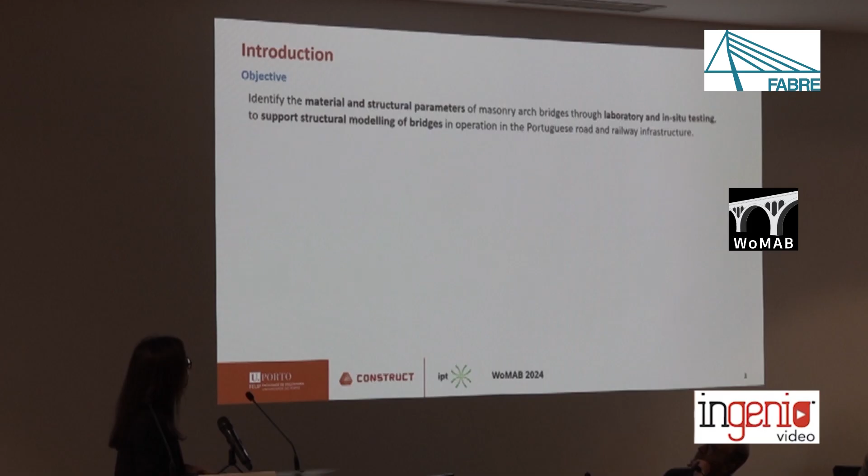I will talk about the experimental characterization of the structural behavior of masonry arch bridges, focusing mainly on experimental activities we conduct in our research group. The objective is to identify material and structural parameters of masonry arch bridges through laboratory and in situ testing, to support structural modeling of bridges in operation in the Portuguese road and railway infrastructure.

The methodology is very similar to the previous presentations, particularly from Professor Carmelo, and includes two components: experimental characterization and numerical modeling. For the experimental characterization, it includes general characterization of the bridges, geometric survey, visual inspections, and preliminary tasks. For the experimental activities, material and structural characterization, including lab and in situ testing. With all this information, we support updating and validation of the numerical models, and then perform structural analysis and structural assessment.

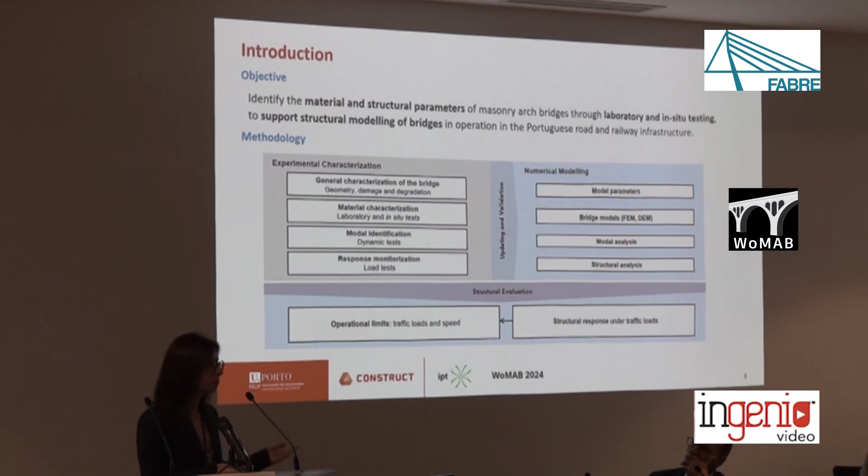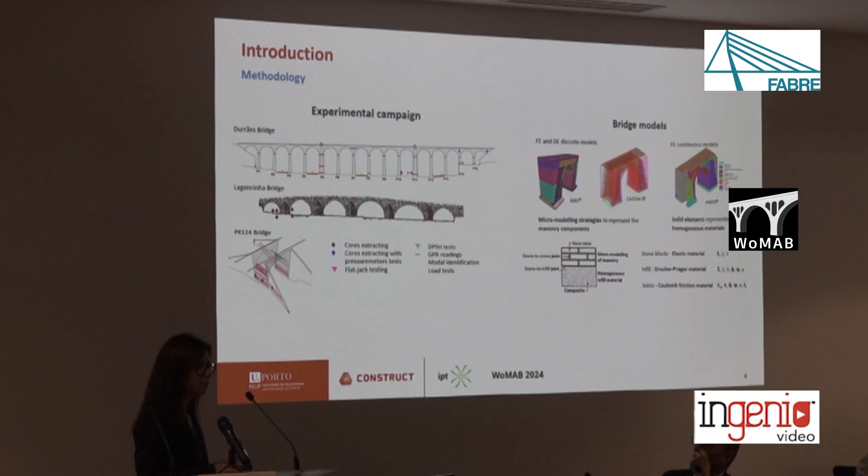Some words related to the bridge models on the right-hand side: we consider both FEM and DEM discrete models as well as continuous models. We can see three cases for the same bridge. In all cases, we consider a very detailed discretization of all the bridge components and materials, so a lot of parameters need to be defined. Hence the importance of defining model parameters based on experimental data and correlation between experimental and numerical results.

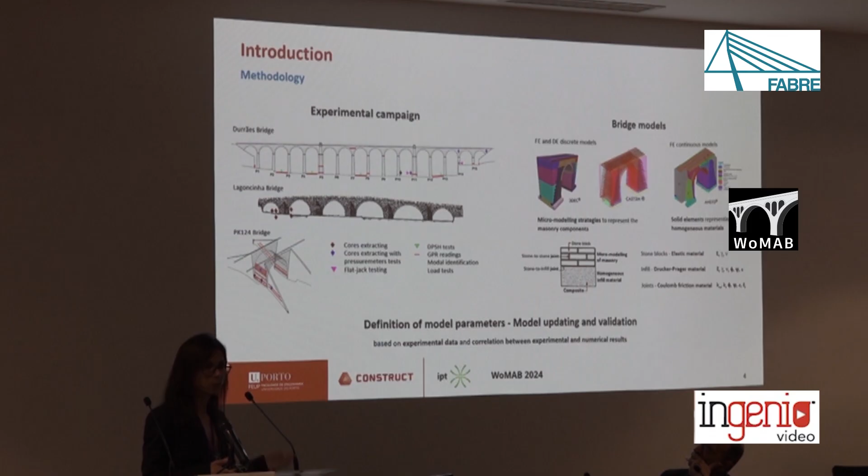First, some words about the case studies, bridges from the Portuguese infrastructure. They are all in granite stone. Here are two cases of railway bridges on the same line in northern Portugal, of about the same age. The first one, Durrães, with 16 arches. The second one with just one arch, a very common typology in our railway infrastructure.

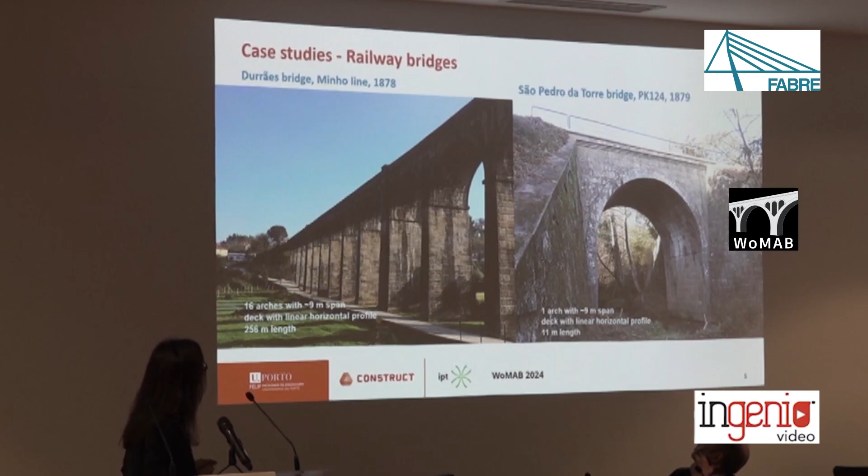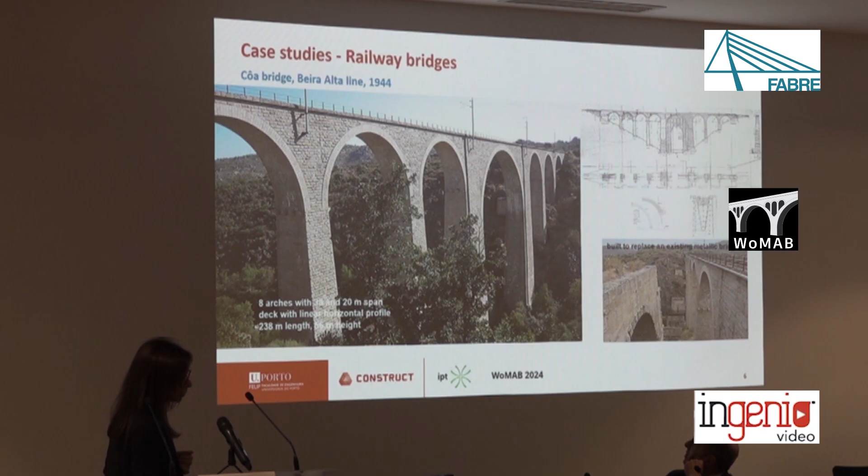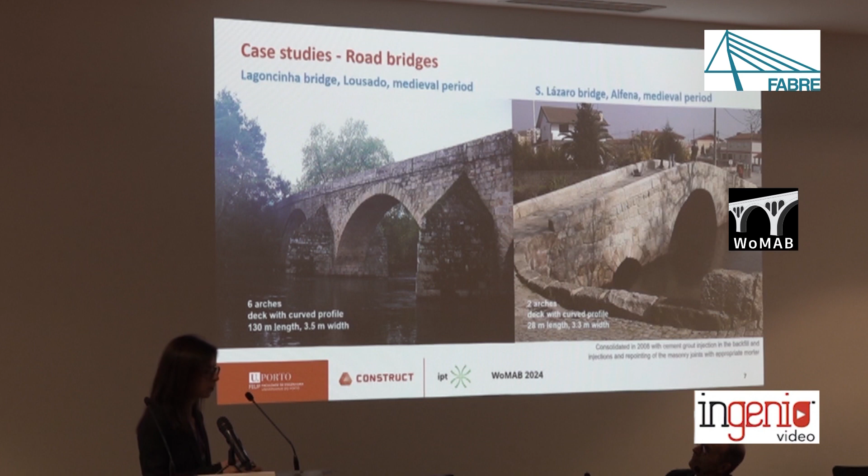We also developed some studies on road bridges. Here are some cases: Lagoncinha and São Lázaro, both from the medieval period. The first with 6 arches and the second, smaller, with 2 arches. Finally, Vila Fria Bridge was constructed in 2007 using traditional techniques. We were involved doing research on this project, which concerns this type of construction.

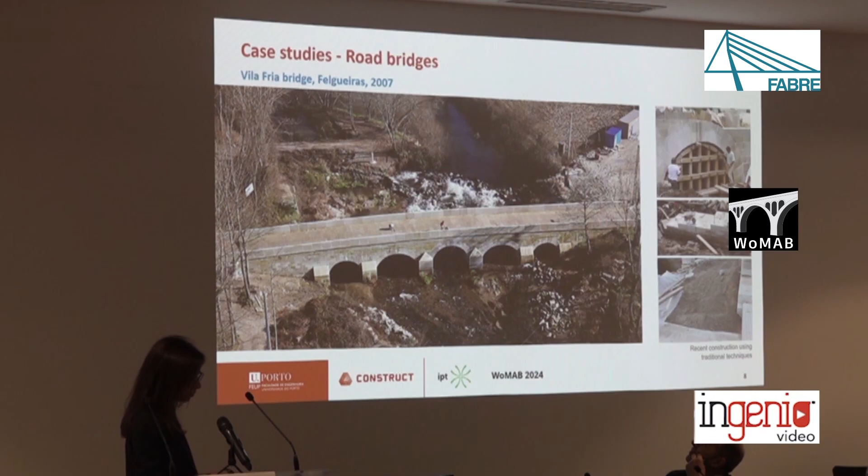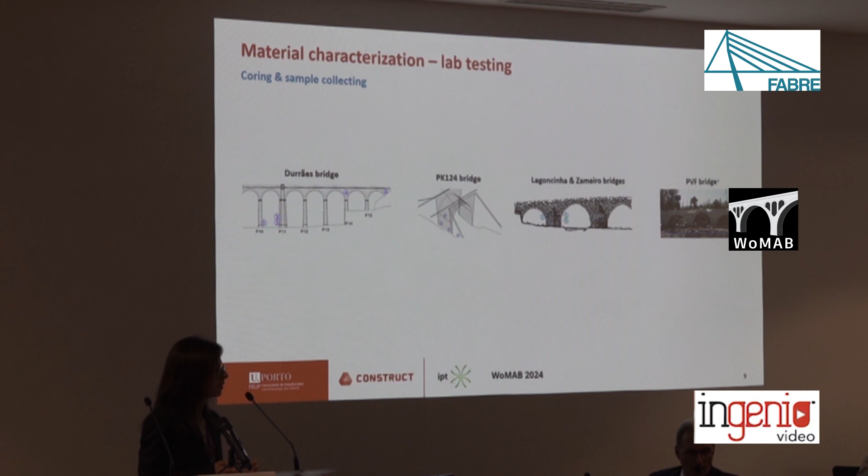We have some studies. Now going to the experimental campaign, starting with material characterization. The activities involve coring and sample collection. Here are some locations on some bridge cases, and all the samples collected relate to stones, joints, and infill in these old bridges, as well as samples from the material used in the construction of the new bridge.

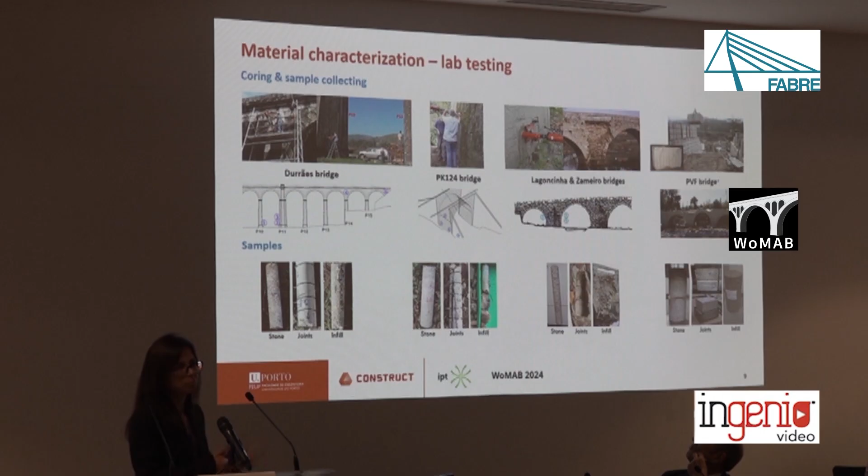We should note that for the stone, similar materials are used, granite stone. Also for the old bridges, the joints are quite similar, mortared. But regarding the infill, we have quite a difference between the railway structures and the road structures, with a cohesive material in the railway bridges and granular material for the road bridges.

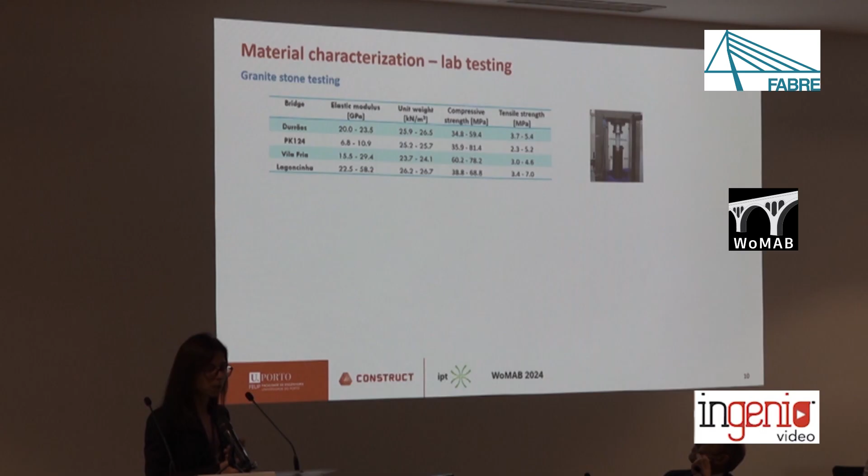Going to the lab testing, we performed the usual tests for this type of material on samples of granite stone, allowing us to obtain the elastic modulus, unit weight, and compressive and tensile strength for all the samples collected. We can see here the range of values we used for performing our structural assessment.

This allows us to evaluate the elastic modulus, but also parameters such as the friction angle and the cohesion.

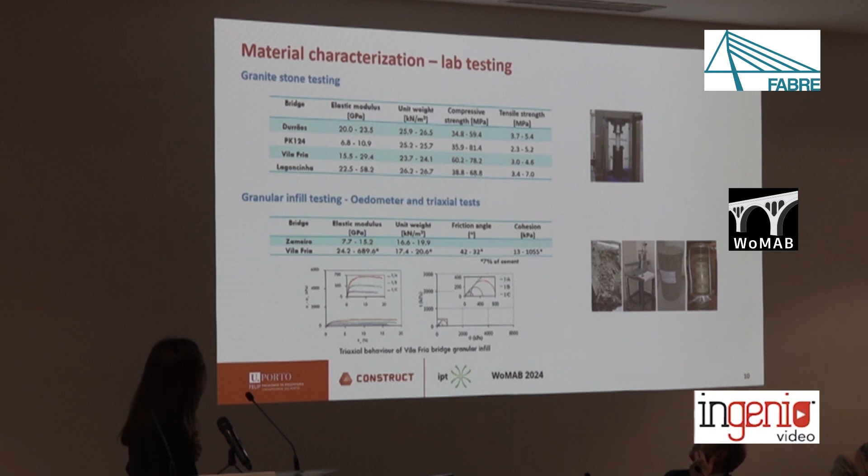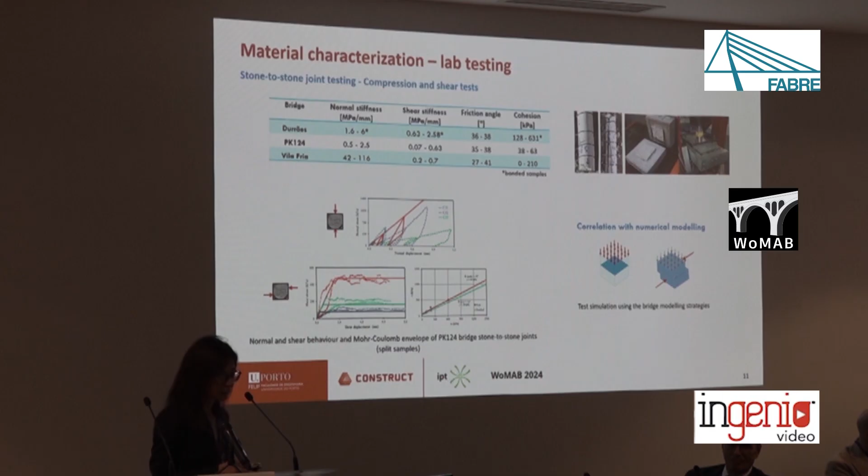At that level, we perform also correlation with numerical modeling using the same strategies we use for simulation of the whole bridge model, allowing to somehow validate at a material level the parameters we are going to use. We can see here the comparison between the experimental and numerical results with good correlation.

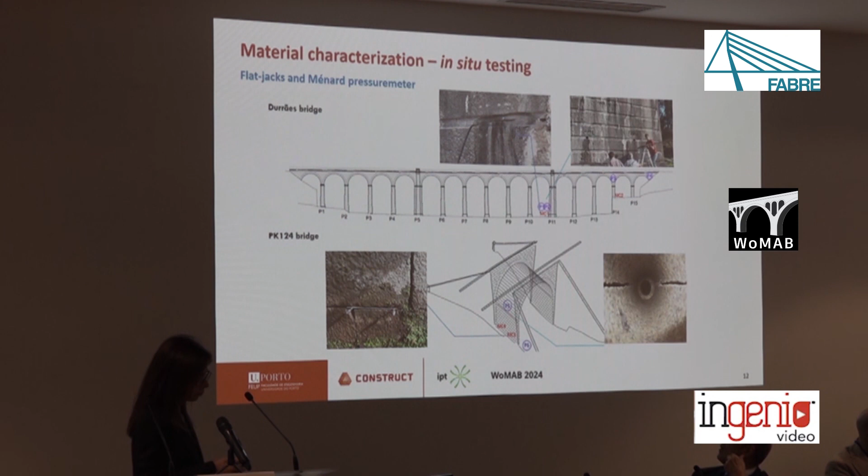Then in situ testing, flat-jacks and Ménard pressuremeter tests were performed in 2 cases of bridges, the locations. With the flat-jacks, we use 2 devices to perform double flat-jack testing. We can estimate the in situ deformability of masonry. We see there the plots of a cyclic test and the corresponding range values of the elastic modulus.

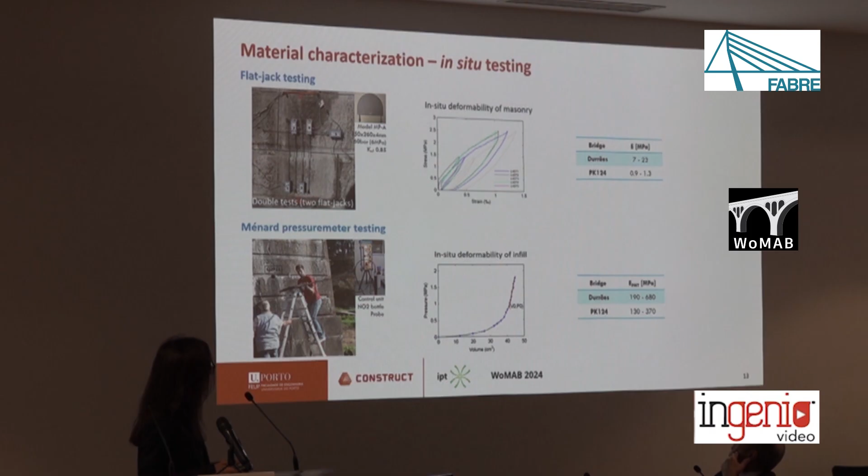For the in-field, in situ, we performed pressuremeter testing using the previous coring to insert the probe. You can see in the image, and the plots show the behavior recorded, and the estimations of the pressuremeter modulus, which can be correlated to the elastic modulus of the materials. So also at that level, we conduct correlation with numerical simulation.

Shown there, using a discrete strategy to simulate the flat-jack testing and the results, allowing the comparison between numerical and experimental behavior. For the pressuremeter testing, also numerical modeling was conducted, and here using a continuous model.

In all cases, at that stage, at that level, we can draw some conclusions related to the calibration of the material parameters to be used in global simulation of the structures.

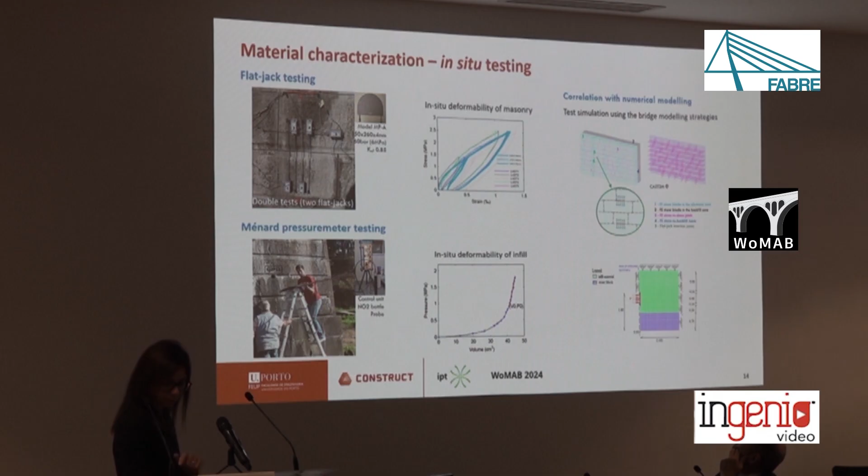Then, going for global characterization of the structures, we conduct also modal identification in almost all cases of the bridges we have studied. Here are some cases with the setup of the tests and the accelerometers placed on the deck.

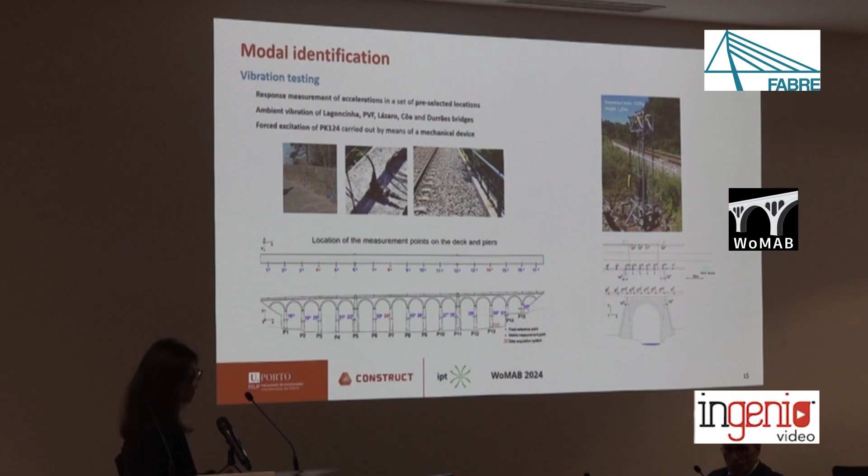In case of that bridge at São Pedro da Torre, because it is much more rigid, we have to use an additional device to produce more vibration on the bridge, but in the end we could obtain the experimental dynamic characteristics for all cases of these bridges.

We can compare also here just the first frequency for the larger bridges with the smaller ones, and of course we have lower values of frequency for the large ones, and much higher results for this type of constructions.

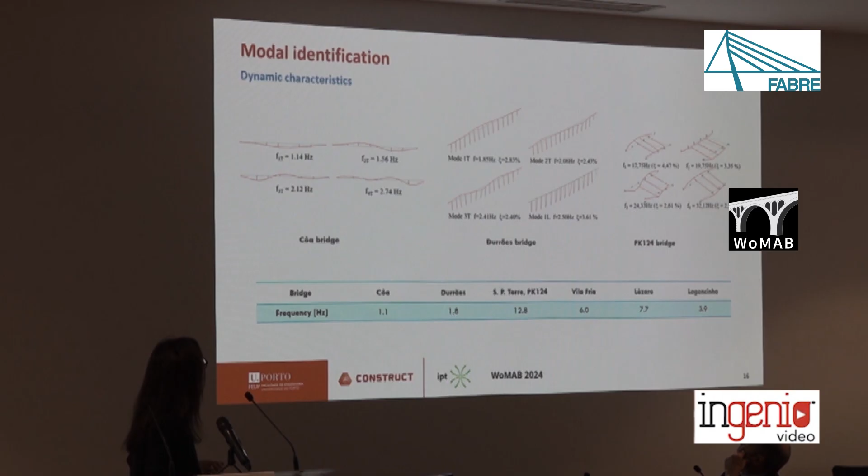Then the correlation of the experimental and numerical modal parameters is for us an important step for validation, particularly the elastic parameters. I show here a comparison between experimental and numerical dynamic characteristics of one case. Ruben Silva will talk later more about this bridge.

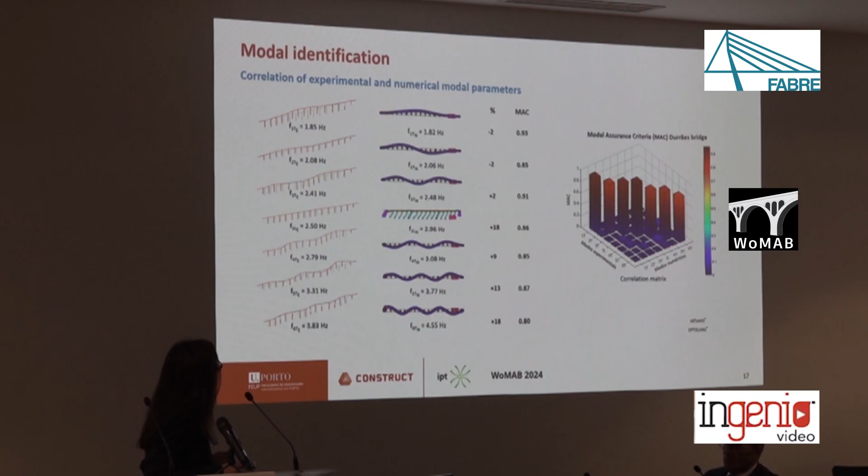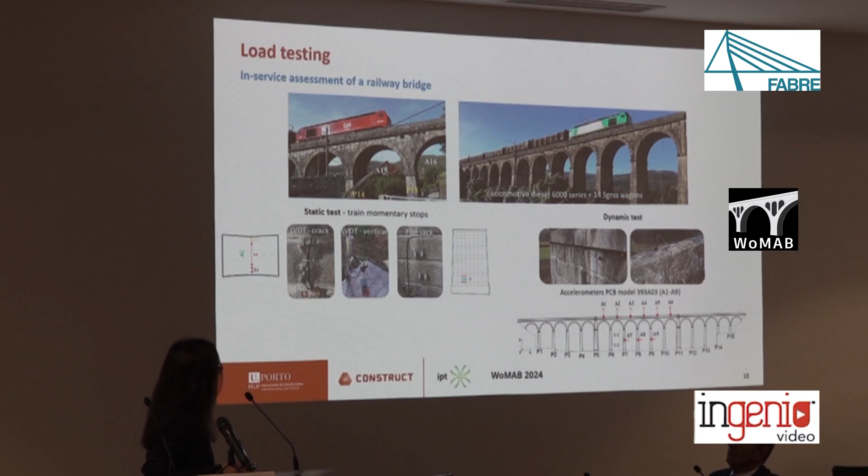Also related to global characterization, load testing were performed, considering static and dynamic conditions, using the instrumentation to obtain the experimental behavior of the bridge response, and also allowing some comparisons with numerical modeling. Ruben will also explain more details on that.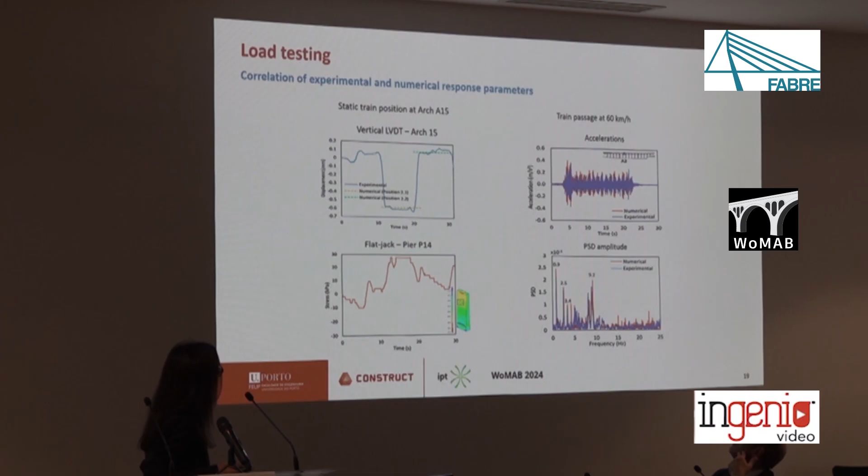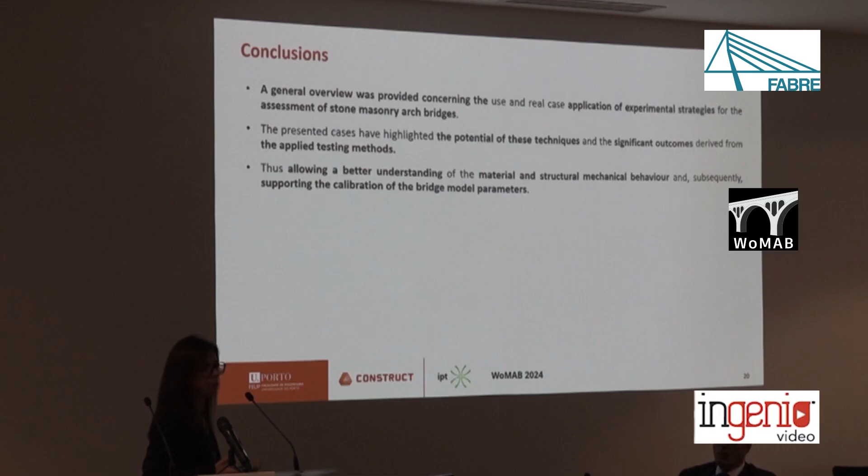So, some conclusions. A general overview was provided concerning the use and real case application of experimental strategies for assessment of stone masonry arch bridges. The cases highlight the potential of these experimental techniques and significant outcomes of the applied techniques, allowing better understanding of material and structural behavior, and also supporting calibration of the bridge model parameters.